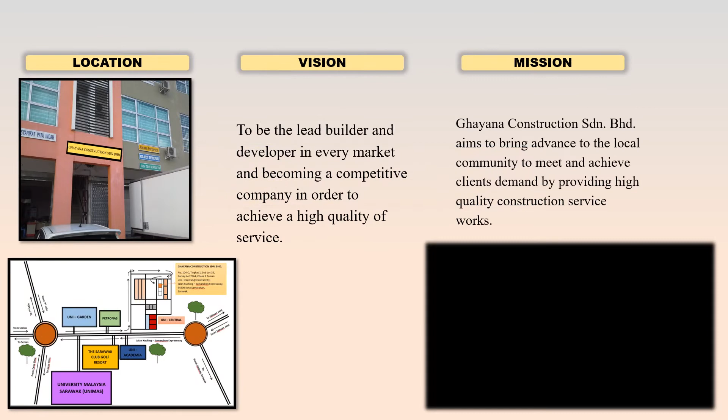Moving on, the picture shown in the slide is our company. Our company is located at Phase 9, Taman Uni Central, Central City, through Jalan Kuching Samarahan Expressway. It is a very strategic place because of the accessibility and it is not congested with traffic.

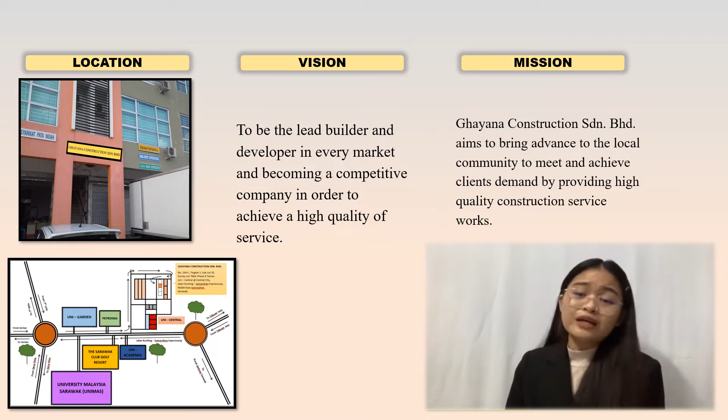Our vision is to be the lead builder and developer in every market and become a very competitive company to serve high quality service. Our mission is to bring advancement to the local community in achieving clients' demand by providing high quality service.

Now I will be presenting the site layout. This is the picture of our site layout, designed by the consultant architect of Ghayana Construction Sendirian Berhad.

According to the site layout, the building is shown to be located near the Unit Kesehatan. Based on this layout, the area will be surrounded with a hoarding fence.

At the entrance of this building, there will be a project signboard, a wash bay, and a guardhouse. The areas of this building will also be surrounded with trees and bushes around.

Inside the area, there will be a few temporary buildings such as the consultant site office, contractor site office, temporary worker quarters, temporary canteen, storeroom, and cylindrical balancing tank.

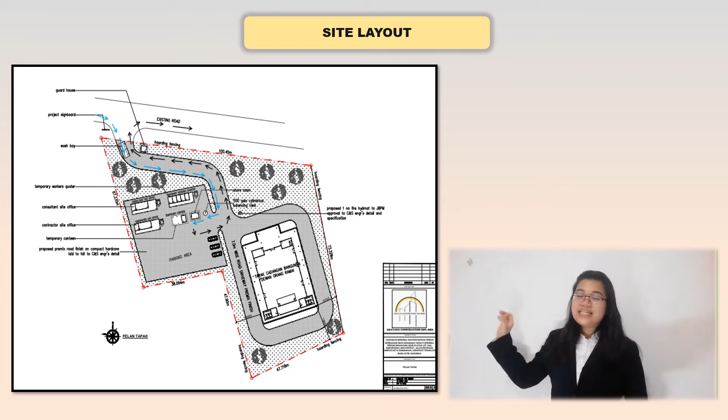And the building itself. A fire hydrant will also be located near the building so it can easily reach the building in case of any emergency.

The parking lot area for this building will also approximately fit 10 to 15 cars.

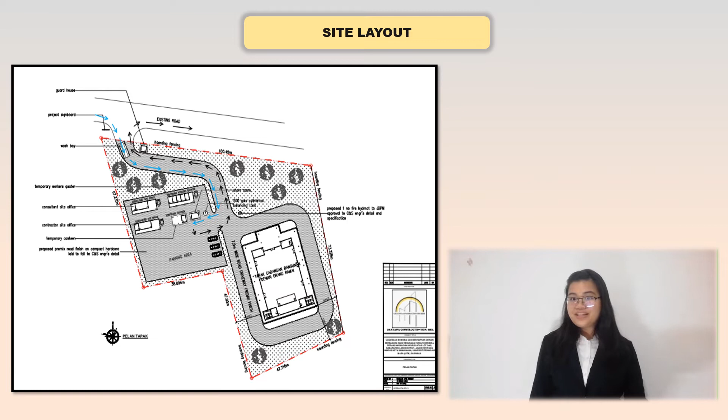I'm Eldaria Diana Claudius Fong, and today I'll be presenting about the schedules and site organization chart of our company. This project started on 24th of April 2020 for a duration of 24 months and ended on 22nd of April 2022.

Our company has found that the highest labor production throughout the construction progress was in the month of April 2021, which was 37 laborers working that month.

Work that involved was finishing work for the staircase in early April, from the 6th to the 15th of April, which consisted of general workers and painters.

Next, on the 16th of April, framework started and ended on the 14th of May, which consisted of bar benders, carpenters, general workers, and concreters.

The least number of labor production was in the month of April 2020. The work involved was scaffolding and hoarding, from 24th of April to 11th of May, which only consisted of general workers and the project director, totaling only 6 laborers.

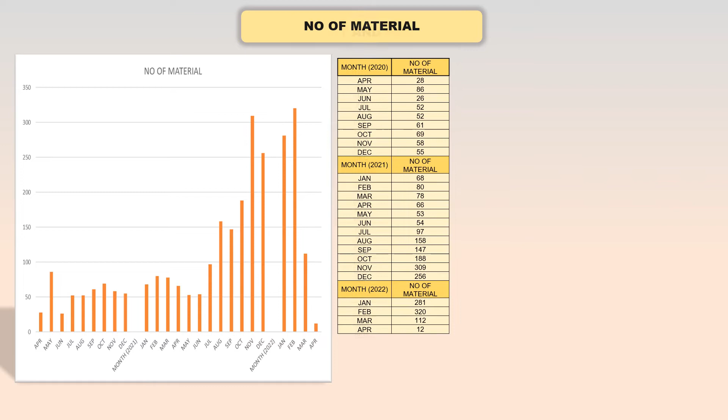The highest plant and machinery production use was 14, from 4th of December to 1st of January 2021, which was the concrete mixer. Our company used less plant and machinery because we mostly used manpower.

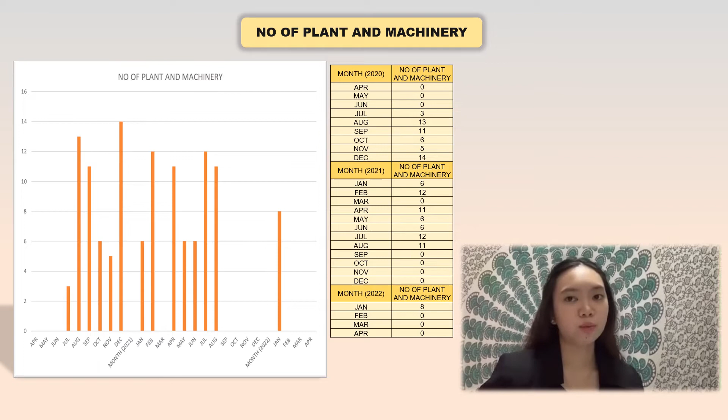The report from the site supervisor and project manager will be reported weekly to the project director regarding the progress of the project. The supervisor will supervise all the workers before starting to work by making sure all workers are wearing PPE, personal protective equipment, for the safety of the worker.

Site quantity surveyor will manage all cost plans for the project and prepare contract, tender documents, and bill of quantities. Site supervisor M&E is responsible for the supervision of operating, reviewing the quality of work and progress required, and coordinating site work to ensure the progress of work effectively.

Safety officer will be managing reviews of the safety and health system and provide all the workers personal protective equipment, PPE, such as safety helmet, safety boots, and gloves.

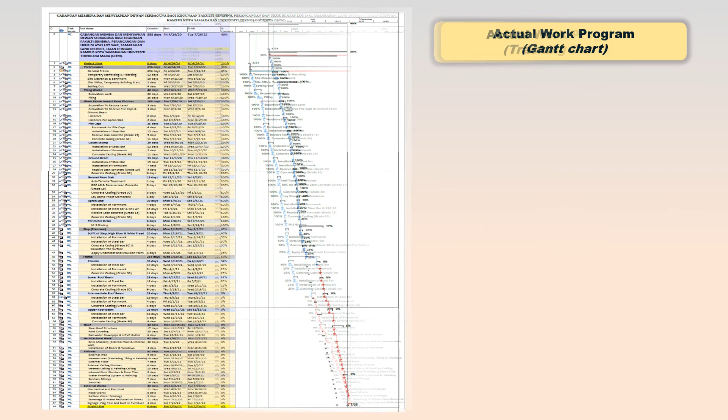This is our tracking Gantt chart. Due to a 90-day delay, our works and activities have been shifted, and a new tracking Gantt work program is produced. The gray color is our actual activity, but after the date has been adjusted, a new work program is produced, shown in red. A new date is produced, making our project end on 26 July 2022.

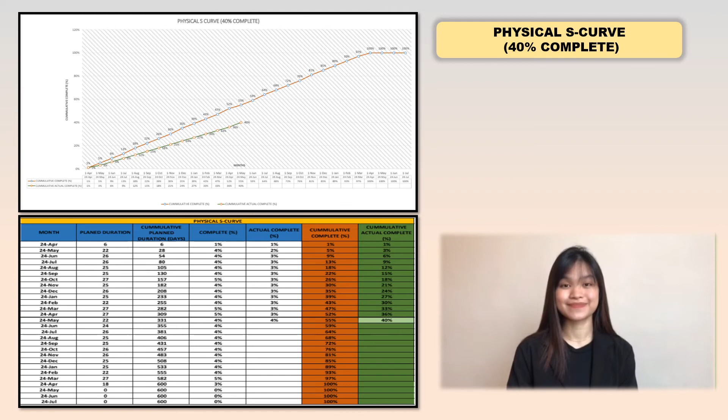The types of activities that our company will hold for our workers' safety and health are fogging, housekeeping, safety briefing, and checking on fall protection. Fogging will be conducted once a month. This is to eliminate mosquito breeding at the construction site, and to prevent dengue cases from happening.

Safety briefing is mainly on briefing and checking on workers. This will act as a reminder for all the workers to always be safe and careful during working time.

Housekeeping will be done every weekend. This is to clean up the construction area for a tidy and organized working area. By conducting housekeeping every weekend, this will minimize the risk in the construction area.

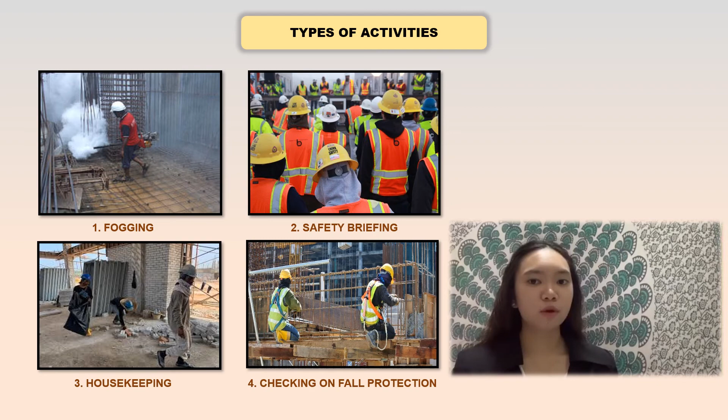Checking on fall protection: safety nets are installed around the building to reduce falling risks for workers working at high areas. In addition, personal fall arrest systems are provided for those working at high areas.

This table shows the accidents of our company. The current total number of accidents is 7: 2 falling from height, 2 over-exertion, 1 electrocution, 1 machinery accident, and 1 burn. Since these accidents happened, our company has been very cautious and has tightened the safety and health rules.

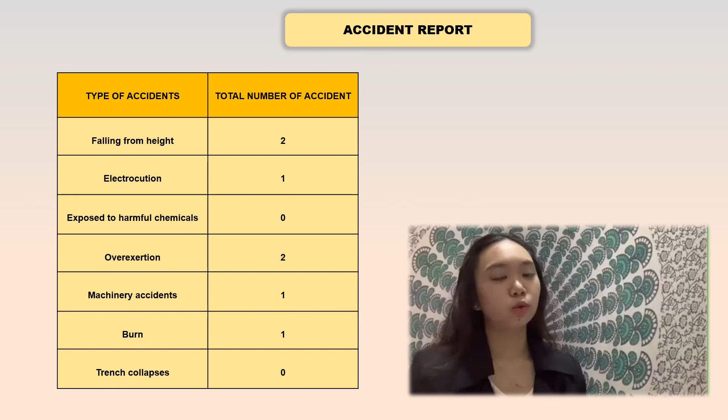Site Safety Implementation Plan. This is our site safety signage plan. We have placed all the signage around our construction area. This is to make sure that all the workers are alert and aware of their surroundings.

They should know that working in a construction area is not safe. If there is any fire outbreak, they should follow the blue arrow, which is the escape route, and assemble in a parking area where the emergency assembly point signage is located.

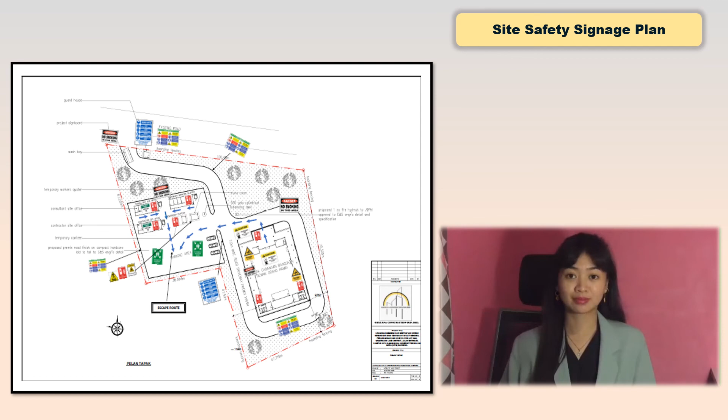Safety signage and its function. Before all the workers go inside the construction area, they should be able to know and understand the meaning of every signage. For example, no smoking signage: workers should know that smoking inside the construction area is not allowed.

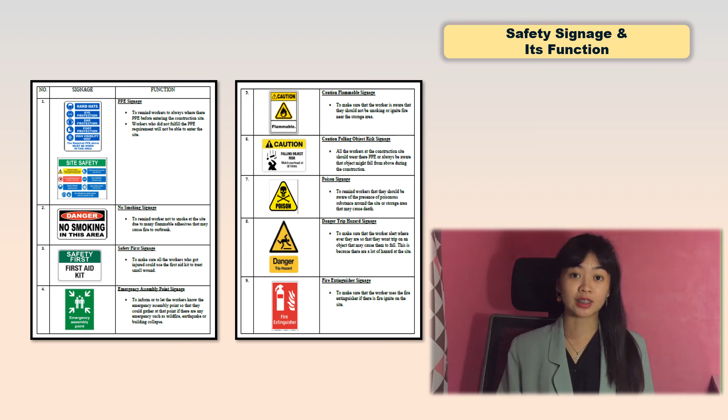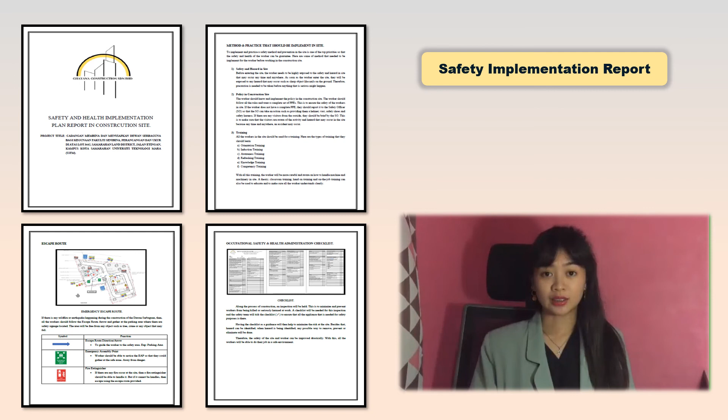Site Safety Implementation Report. Chahaya Construction also provides a Site Safety Implementation Report. This is to make sure all the workers undergo training before working inside the construction area. A checklist will also be provided for the safety officer to go for inspection and make sure all the machinery is safe to use.

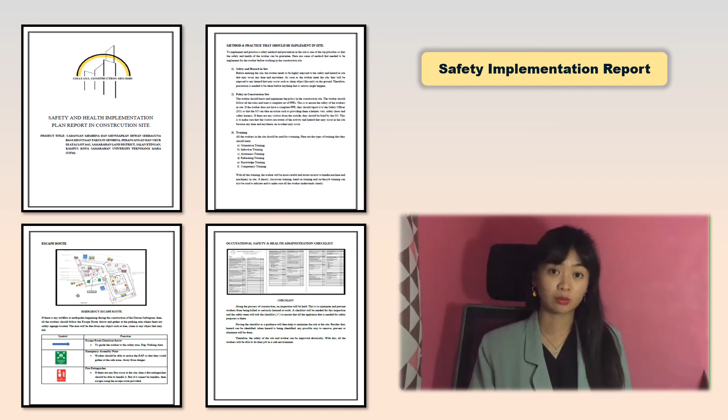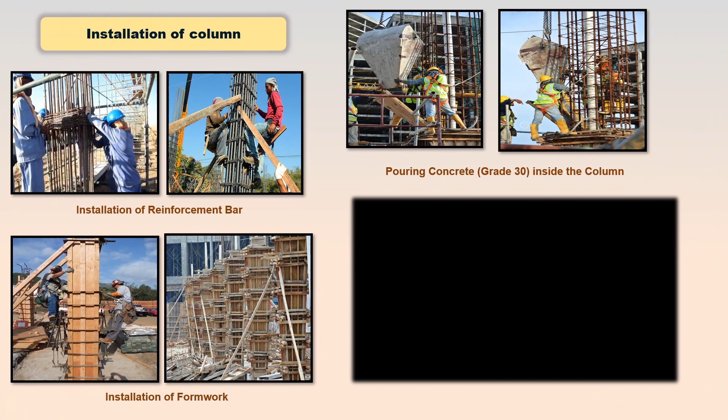Next slide shows us the progress photograph of this project in the month of April. This photograph shows the workers doing the installation of columns at the construction site. The first diagram shows the workers doing the installation of reinforcement bars at the construction site.

Next slide shows us the progress photograph of this project in the month of April. This photograph shows the workers doing the installation of columns at the construction site. The second diagram shows the workers doing the installation of the formwork, and the third diagram shows the workers pouring concrete grade 30 inside the column.